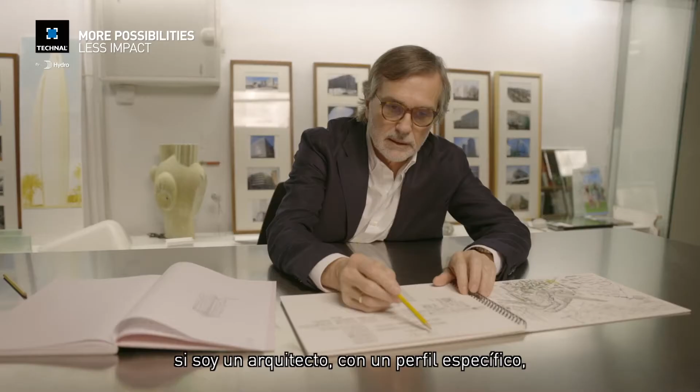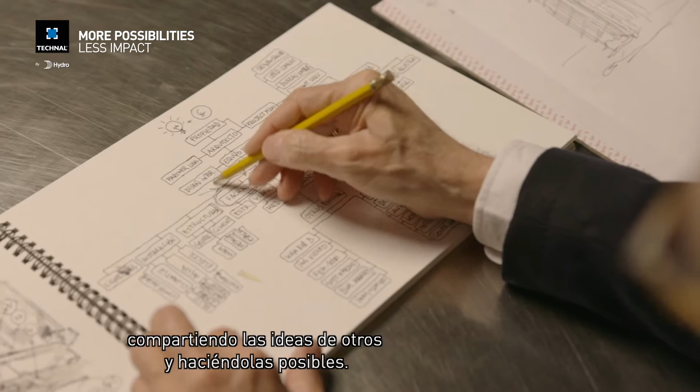First of all, I would like to introduce myself with a simple sentence. Yes, I'm an architect, but an architect with a special profile, because my team and I have developed more than 180 buildings over the last 30 years, making possible the ideas of others, sharing them by teaching in different universities, and especially drawing.

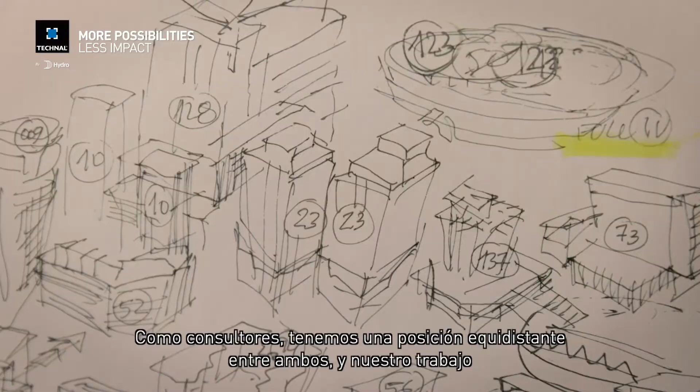We have a small and very dynamic office based in Barcelona, from where we offer facade consultancy for the best architects around the world, especially with even Pritzker Prize. Usually, architects imagine the result and the engineers create the process, or explaining it in another way, architects think what and engineers know how. So we, as facade consultants, move in an equidistant position between both, and our projects are developed with a simple philosophy. Technique and form are the same.

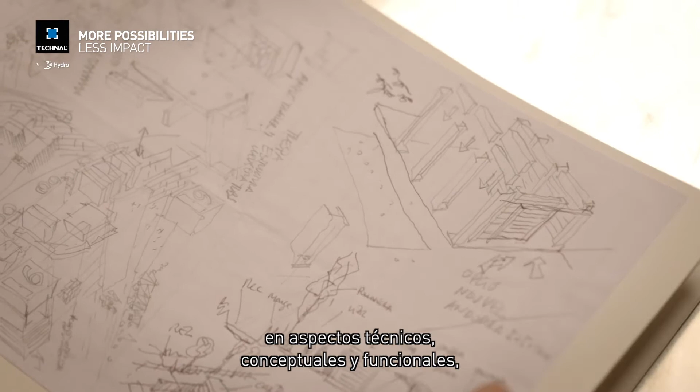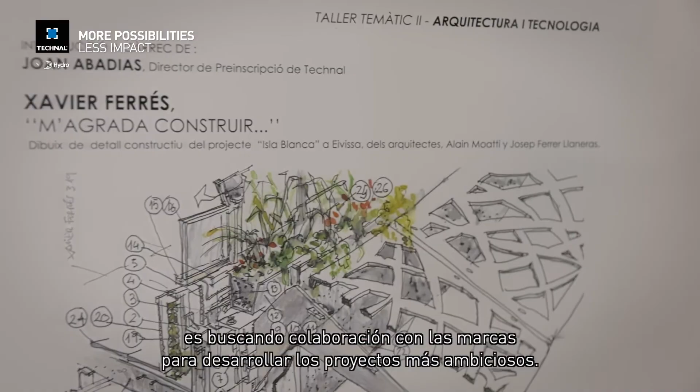Every day, more and more architecture studios focus their work on the level of definition of the facade, the technical aspect and the conceptual and functional development, while the detailing and the specific elements of the facade are delegated to the technical specialists from the industry. So the most common way to face the problem of the technology is to claim the support of brands that help us to develop the most ambitious projects. Our role as consultant, in addition to the above, is to think and advise from the strategic development.

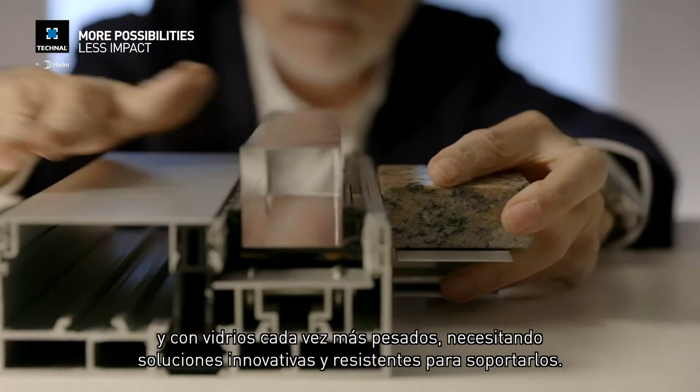The present leads us to consider energy as one of the engines of evolution, and this has been the case for decades. However, this contrasts with the need to work with large formats and glazed surfaces that increase the so-called window-wall ratio, which is the energy performance of the facade, in contradiction with the dimension of the transparent areas of the buildings. On the other hand, this need to increase the sizes requires larger panel dimensions, engineered for bigger and heavier glass panels by means of innovative connections and reinforced glazing support.

Last year, we started with a jumbo glass of 3.2 by 6.2. Actually, we have, with different suppliers, glasses of 18 meters height by 3.4. So, obviously, we can use these sizes of glass.

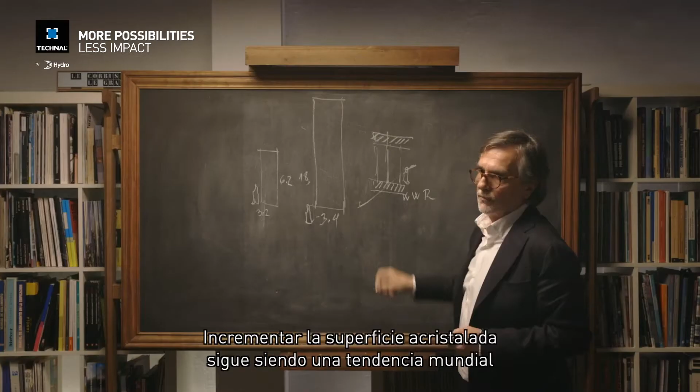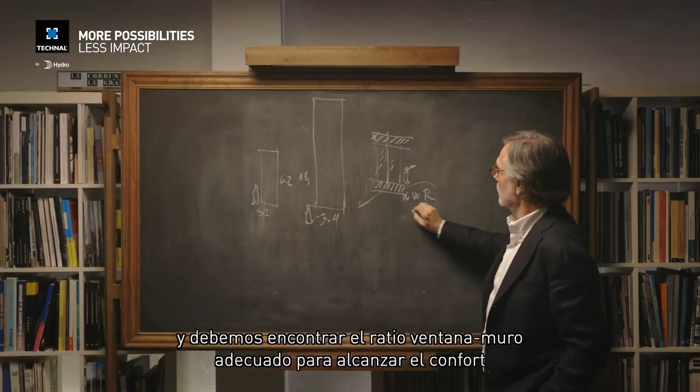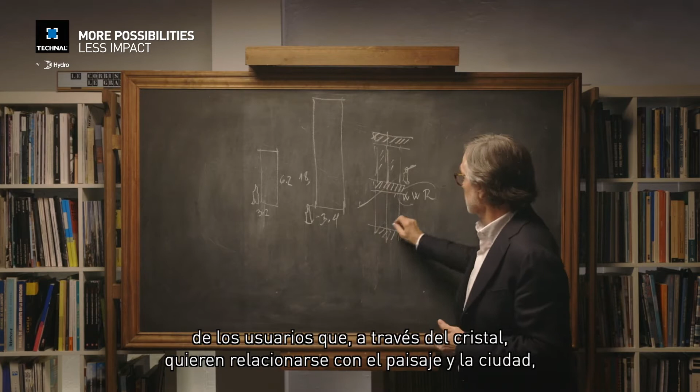The trend of buildings around the world is to increase the glass surface, but balancing it with the window-wall ratio, because we need to balance the comfort of the users, in direct contact across the glass with the landscape, the sea, the rest of the city, in order to respect the rules and regulations in terms of energy savings.

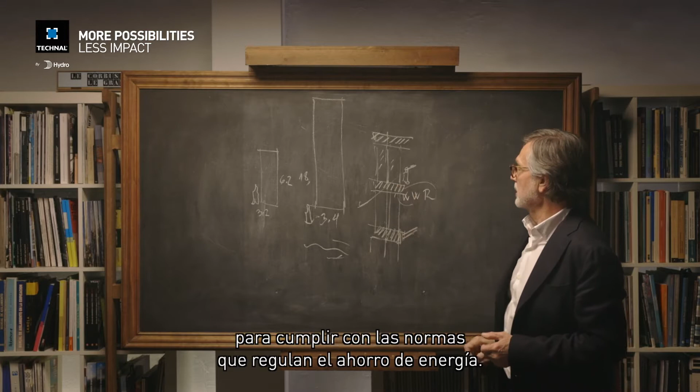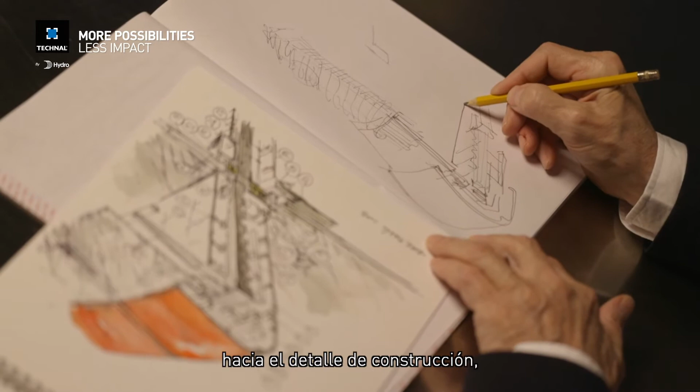The only way that I can explain my experience, my thought, my feeling about the technical decisions, the technical elements, is drawing. My brain is connected with my hand directly. When we are creating, we have to pass from concept and schematic design to design development and construction documents, trying to be proactive with the architects, usually our clients, in order to achieve the maximal fidelity to the original idea.

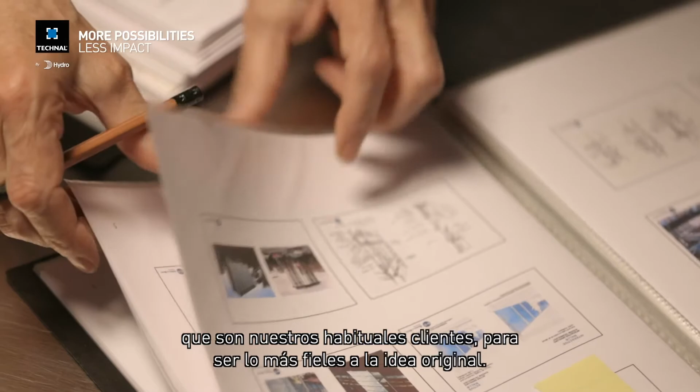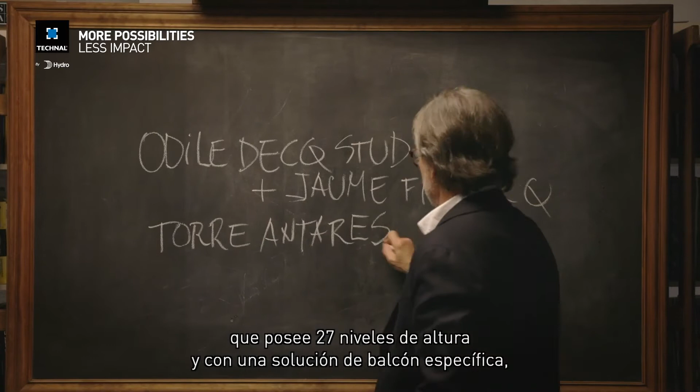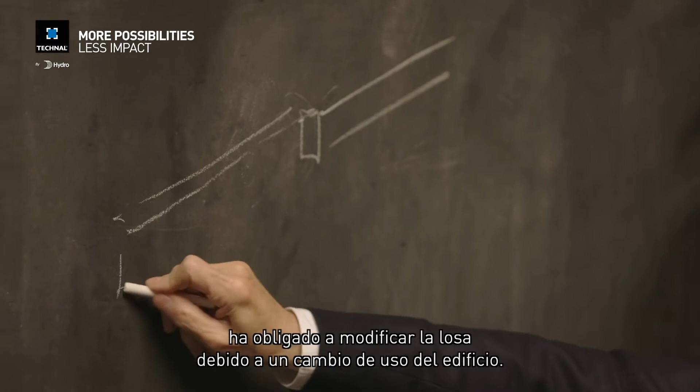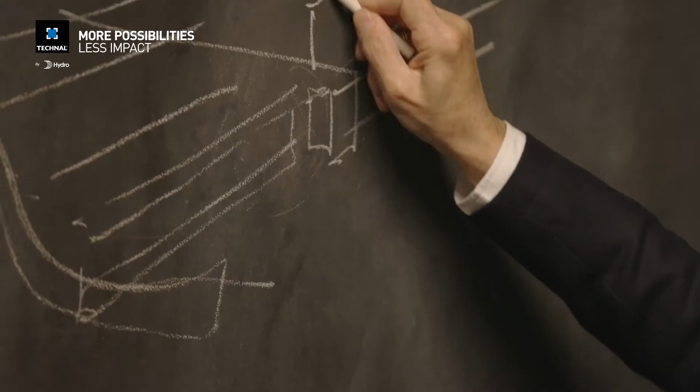For example, a building under construction in Barcelona, named Torre Antares. It's a multi-story building, I think it's 27 levels, with a special balcony. This is the original slab, because it's a huge modification of the building. This is the slab. This is the beam that we have to support. The level of the interior floor. This is the exterior floor, and we have a shape like this. This is a balcony, this is a terrace. The building is something like this.

It's more or less 110 meters, and all these balconies are here. And here, in the lateral facade, we have a typical curtain wall. It's a typical profile with spandrel and glass and windows, etc. The pass from here to here is very important to understand what happens. What is the slab? What is the structure? What is the weather line?

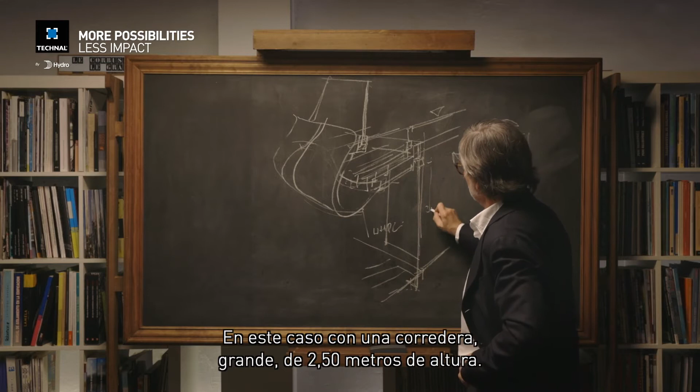In this case, with a sliding corridor, a huge sliding window, maybe 2.50 meters height, and this is a part. We'd like to show this in color, but I think that it's clear in order to understand what happens when we have to develop from the concept to the detail.

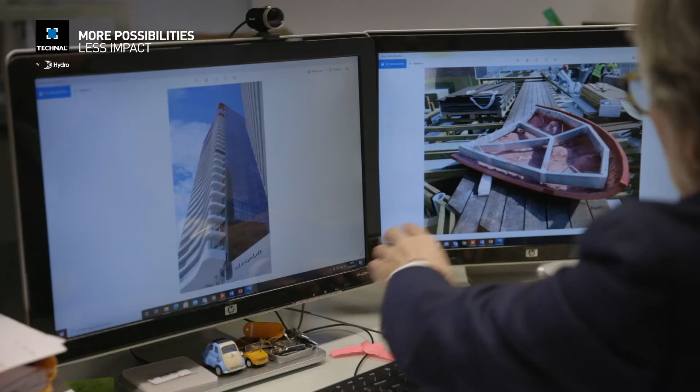The second case that we'd like to share with you is a commercial and residential building in Ibiza, named Isla Blanca. The author is l'agence Moatti-Rivière de Paris. The project is led by Moatti, and the local partner is Xavier Ferrés. The main concept is a shadow device named voilette in French. It's an element that flies.

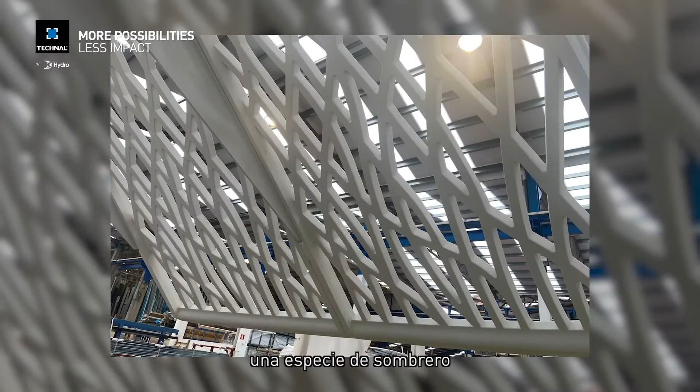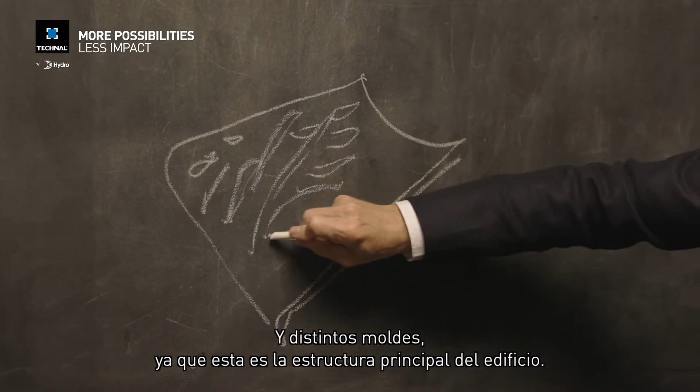So the building is double like this, maybe 80 meters of length from here to here. To use this kind of material like a hat that produces the shadow on the face of a woman on the beach. And this element is something like this. There are different molds because this is the main structure of the building, and here is hanged a huge element like this that supports these curves.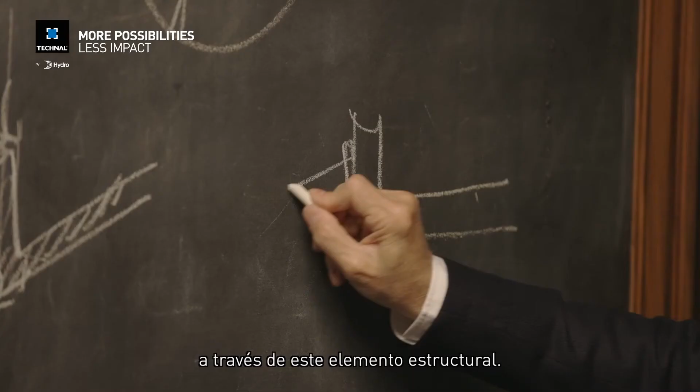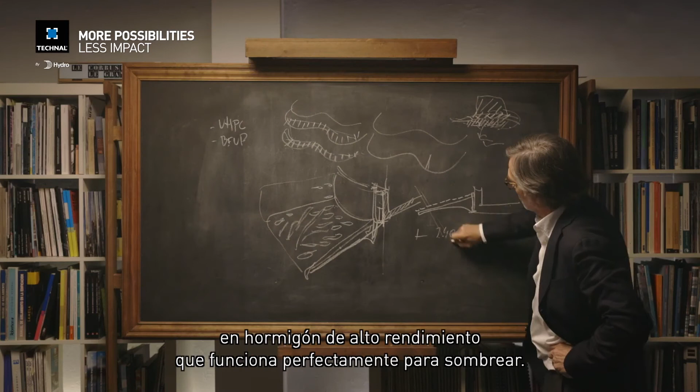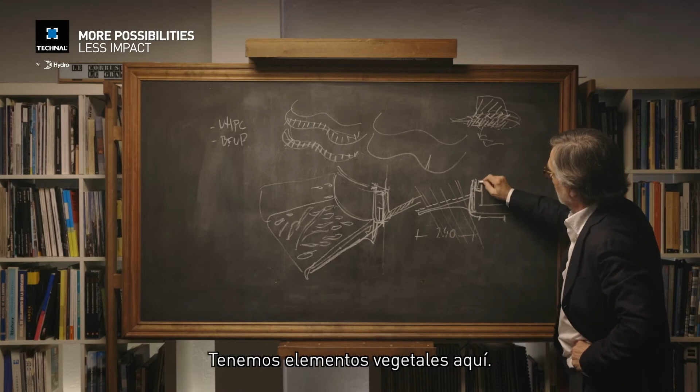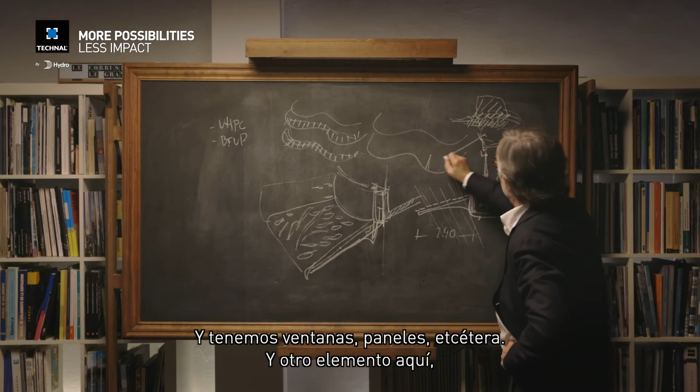So we have the structural element. This is a cantilever, more than 2.40, and this is the voilette in ultra high performance concrete that allows it to work perfectly like a shadow device. So we have the vegetal elements here, and we have the windows, openables, etc. So we have as well another element here that is the characteristic of this building.

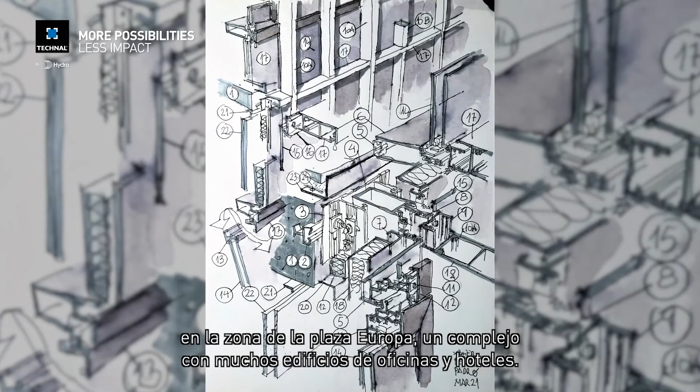The third case study is a multi-story hotel in l'Hospitalet, near Barcelona, in the Plaza Europa zone. It's a huge complex with a lot of buildings, hotels, office buildings, etc. This case is a project of Alonso y Balaguer. It's the most common and typical curtain wall facade. The building is a parallelogram like this, with a typical zone with machines and the HVAC equipment, etc.

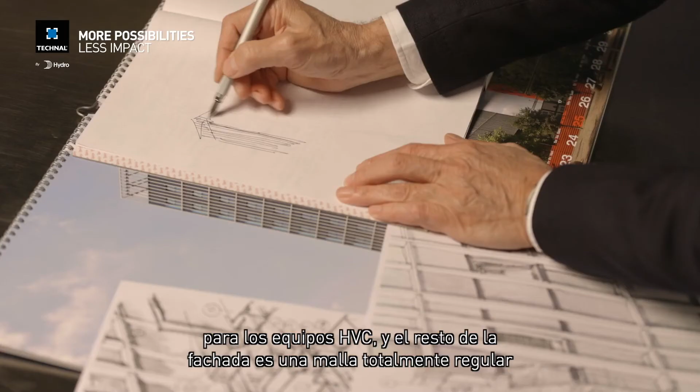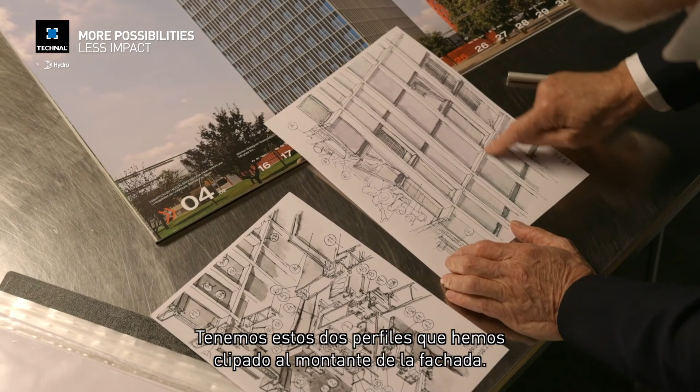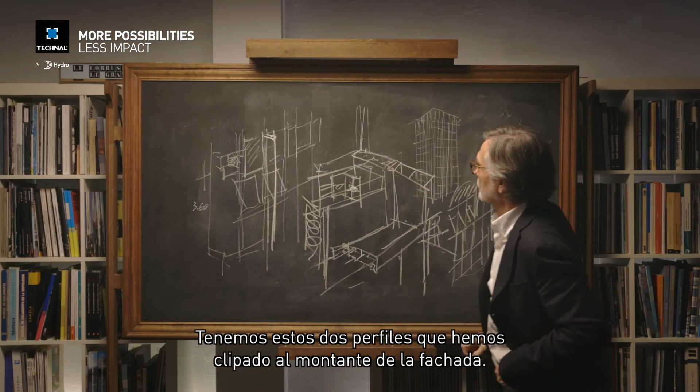And the rest of the facade is a grid, absolutely regular, with the profiles that I will explain, because in terms of technology it's very simple, but the effect is really very interesting. So we have these two profiles, and they are clipped to the main mullion of the facade. And that's it.

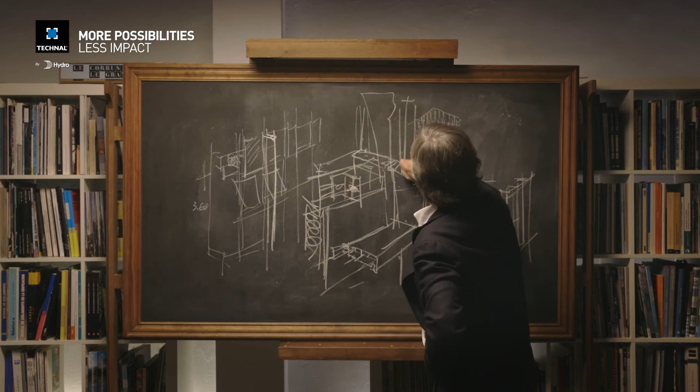So here we have the Toyo Ito building, the Nouvel building, RCR here as well, Moneo, and it is a very interesting complex that I invite you to visit, because if you are a passionate architect, I think that could be a good option to spend one day in order to know directly all this kind of different architecture.

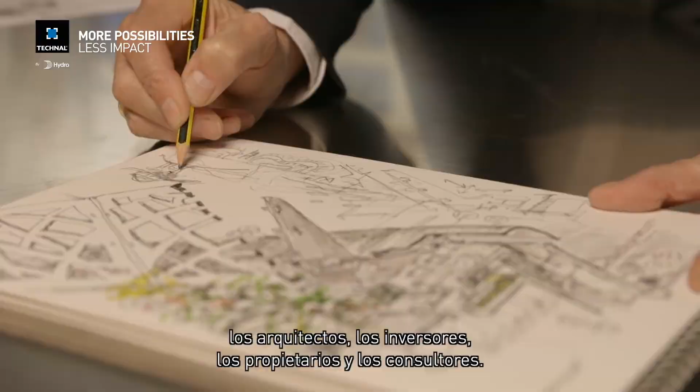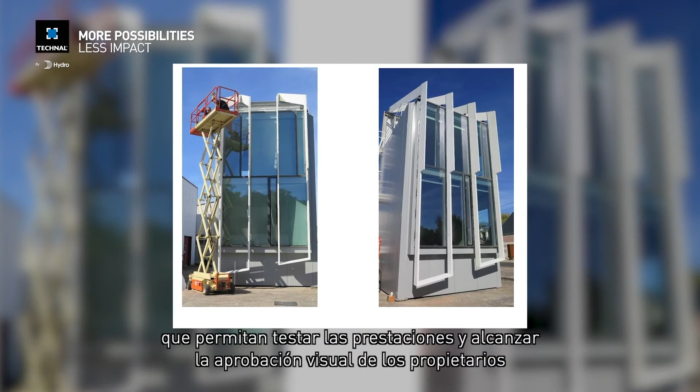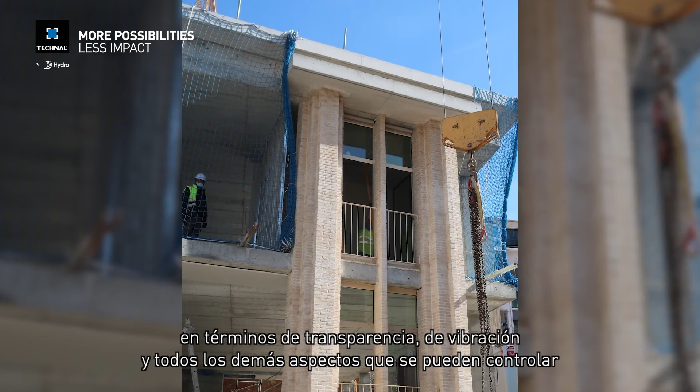As conclusion, I would like to share with you 5 thoughts as a summary. First of all, evolution that improves considering aspects from different points of view, like industry, architects, investors, owners, and consultants like us. Second, the extreme conditions of use are solved anticipating the problems and building samples and performance and visual mock-ups that are tested by the owners to approve the final solution, in order to check the transparency, the vibration, all the aspects that we have to control by using prototypes and mock-ups in real size.

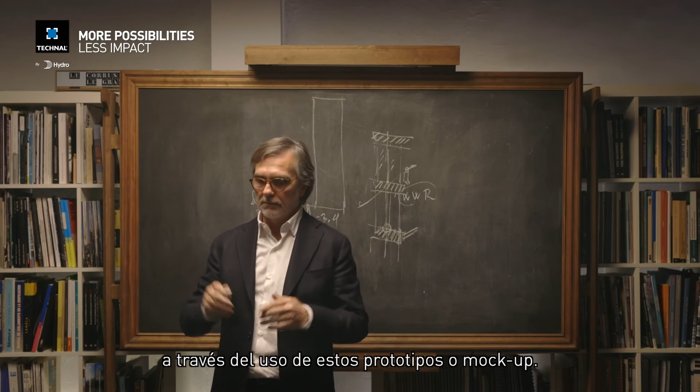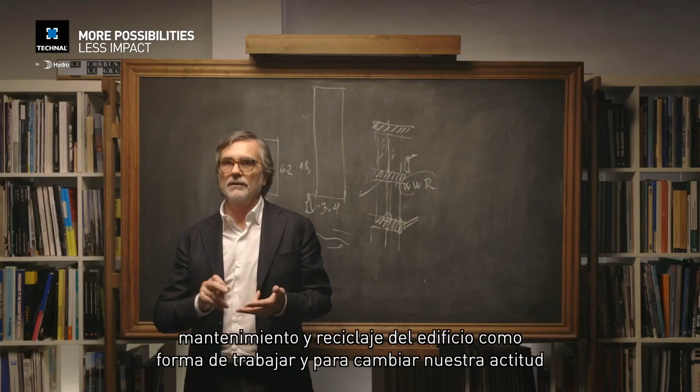Third, we have to look for collaboration with international brands that belong to a big and well-known group. It is the best option to guarantee a long experience of success. The fourth topic that I think is important to sum up this small explanation is to involve the clients and users in the project. Planning, commissioning, exploitation, maintenance, life and recycling of the building as a way of working, because we have to change our attitude about the design and use of the buildings.

And finally, we have to work from a global perspective, making it essential to combine the most diverse languages, cultures, rules and regulations, economic and social criteria with the most attractive architectural proposals. And for us, it's a privilege to be able to create a space for a better future.